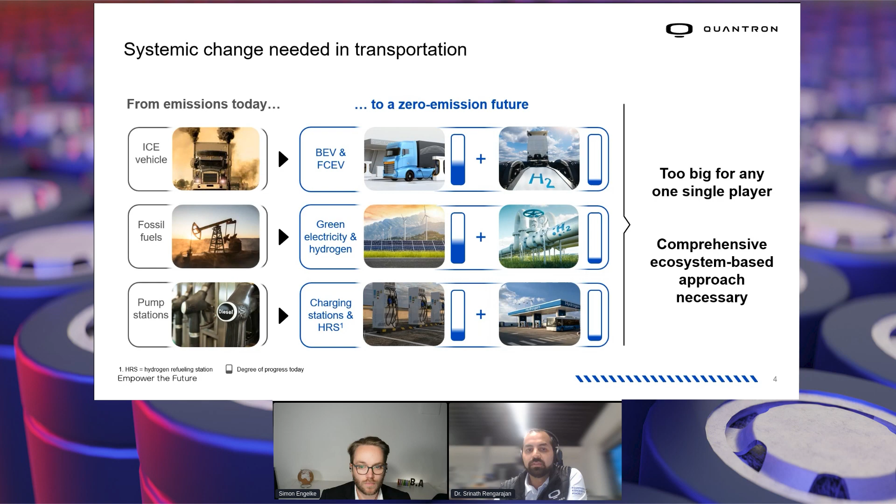But that brings me to the question: what are we talking about? Is it the battery electric or the fuel cell electric vehicles which will supposedly win this race they are in? These are, of course, the leading technologies we're talking about in terms of zero emission. There are other options too which have been explored - hydrogen ICE trucks, biofuels, synfuels, on-road charging. And there have been different views on which technology is better, even dogmatic opinions, with people calling one or the other technology really foolish, looking at various factors and saying this is better or that is better.

But we need to take a look at the bigger picture to understand, from a system level, based on use cases, what really makes sense. That's the key message I'd like to give you at the end of this. But where do these discussions always start?

They almost always start and sometimes also end with the question of energy efficiency. And when the industry experts are talking about that, it's always about the powertrain efficiency.

And that's sort of a no-brainer. If you think about it, battery electric vehicles, no matter if you're talking about passenger cars or electric trucks or buses, the battery electric solution is the much more efficient one. Well-to-tank you're talking about 85 to 90% efficiency in the battery electric case, tank-to-wheel about 70% overall, simply because there's lesser conversions along the way.

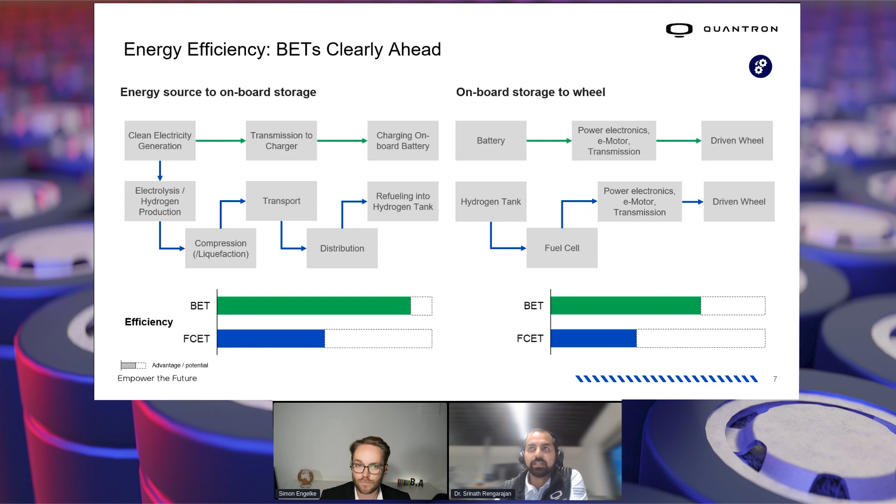And I'm guessing some of you are really happy to hear that, but it's a lot more complicated, especially when you're talking about commercial vehicles. And why is that the case? Like I said, you need to look at it from a system perspective, and the powertrain part is only one cog in that entire system.

There is the part about the energy, so how you're producing and transporting or transmitting the energy to the point of use or consumption, and how you're dispensing it, right? Let's probably take each of these and unpack them a little bit.

Maybe we start with the powertrain because that's the no-brainer. If you think about the technology readiness and industrialization readiness, I mentioned this a bit in the beginning as well, battery electric vehicles are generally a bit further down the road.

So what you see today is already the second generation of battery electric vehicles from the bigger vehicle manufacturers. In terms of passenger cars, it's even the third generation that you see now, so that's even further ahead. But in the fuel cell case, you're just beginning to see the first fuel cell based trucks coming to the market.

And there is, of course, this sort of, if you think about it in terms of a hype cycle, also a dip that the fuel cell vehicles or technologies are seeing, because all the hype that was there a couple of years back probably has started tempering down.

So we know about how things are going at some companies like Nikola, or when Hyundai is pulling out of the Swiss market because hydrogen prices are too high, etc. And that, of course, means that there's a teething issue, a trough of disillusionment that these vehicles and this technology is going through.

But if you think about it in terms of long-term reduction potential of costs, simply because of the way these vehicles are made - the material costs necessary for making batteries versus the costs necessary for scaling up the production of fuel cells or tanks for hydrogen - the potential for fuel cell is probably a little bit higher from today's point of view in terms of what we might be able to achieve in cost reduction. There are just physical and chemical limits that we'll at some point hit with batteries, which are going to be harder to negotiate, and then the next extra X% of reduction in cost will be that much harder.

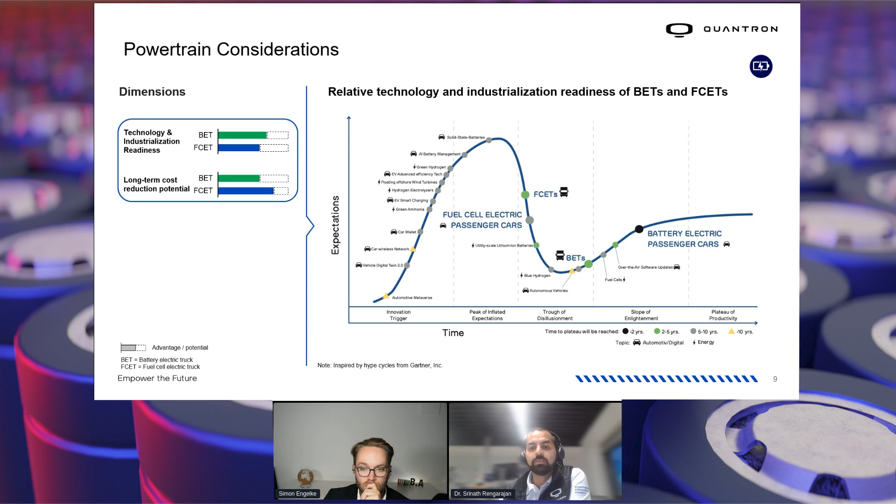If we move on, now talking about the component part, there was a nice study a couple of years back from the European Commission Joint Research Center, which looked at the different raw materials. We extended it a little bit with discussions in Europe as well as in the US with some supply chain participants. And there it looks a little more tricky.

I mean, the picture will look very different if you're talking about a country like China, which has invested heavily in the upstream and midstream of the battery raw materials as well as the fuel cell raw materials. But if you look at it in terms of supply chain risks, simply put, there is lesser risk in terms of the materials necessary for fuel cells today when compared to batteries, especially for manufacturers based out of Europe or US.

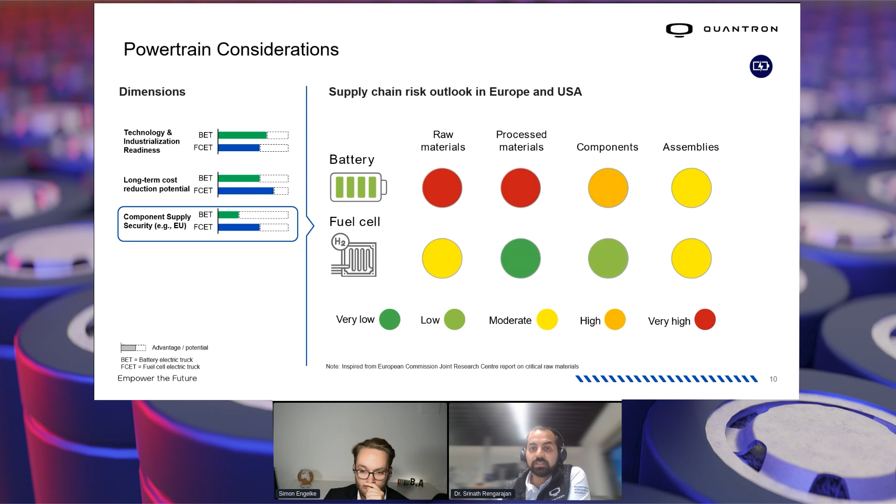And that brings me to the third point. This is an analysis that we did internally based on our own vehicles, but also benchmarking a few of the other vehicles. We basically decided to see what the difference would be in the weight of the powertrain, the more range you try to pack into the vehicle. So it's very simple.

The more range you need to get out of a heavy-duty truck, the bigger and heavier batteries you need. For a range of about 700 kilometers, for example, we already needed about 7 tons of batteries. In comparison, the fuel cell system was much lighter, coming down to about 2.5 to 3 tons, including batteries, tanks, fuel cell, and other aggregates.

So the question becomes a bit tricky, because if you're driving use cases where the amount of mileage you have to cover daily is not too much, then it's easier to say that batteries are the better, lighter powertrain solution. But the more auxiliary power needs you have - imagine you have refrigerated cargo on the truck that needs 20 kilowatt hours of energy just for cooling every hour - that massively affects what range you'll get out of the battery for driving.

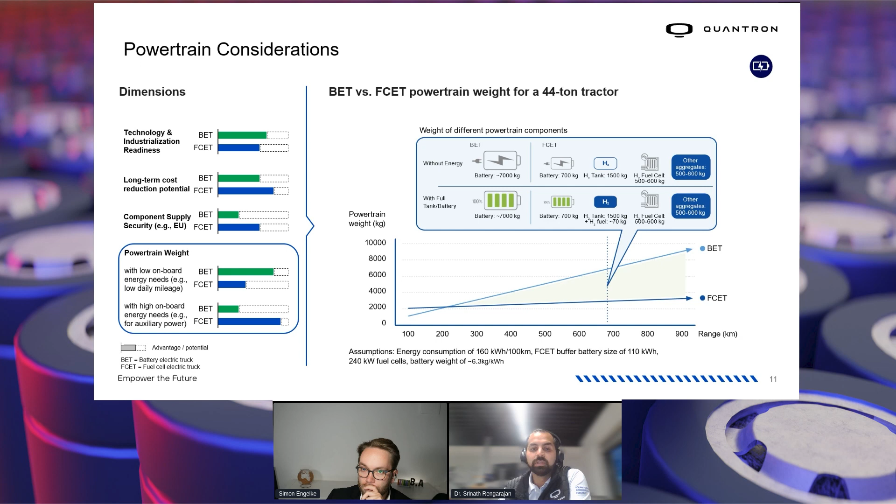And why is that important? Because then you need to recharge. And then it's a question of how much time you need for recharging or refueling the truck, and how easy it is for a driver to shift from today's perspective of refueling a diesel truck into a future battery or hydrogen truck.

From that convenience and time perspective, battery electric trucks even with CCS technology today, for 500 kilowatt hours of usable energy, end up with about 2 hours of charging time. In the future with MCS, that'll probably halve. So the dream of many companies is that you drive for 4 hours, then take 45 minutes to recharge, and then drive again for 4 hours.

That's the vision. But in fuel cell trucks today, it's already less than 20 minutes even for the heavy truck we produce at our company, for a full range of 700 kilometers. In the future, as dispensing technologies improve, we expect it to halve again to about 10 minutes of refueling from zero to full tank. This isn't linear in either case, but just to give you a feeling for how this looks.

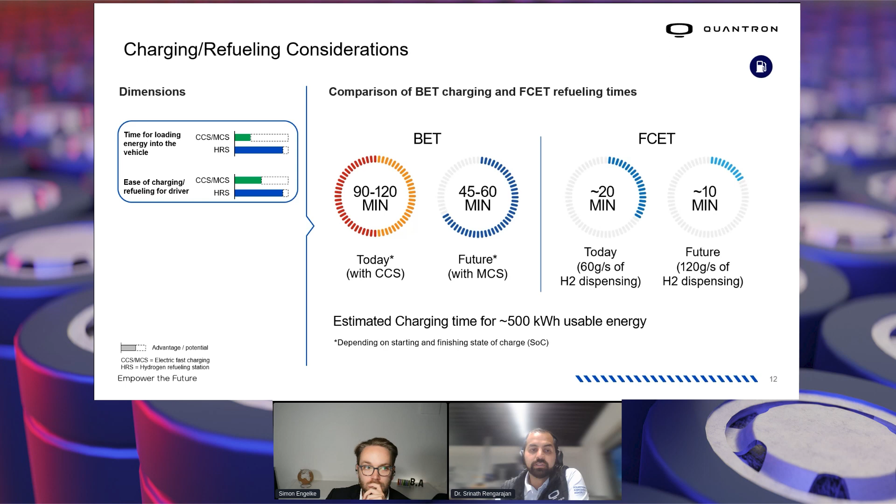At the same time, you have to think about it from a system perspective - how much space and money do you need for setting up a huge charging park, or a hydrogen refueling station? That's important because of the amount of chargers necessary just in Europe, based on an estimate from the European Electric Vehicle Charging Infrastructure Masterplan.

They estimated that for covering the use cases of battery electric trucks in Europe, we would need about 235,000 overnight chargers at depots, as well as 36,000 chargers with CCS plus MCS in the mix at public highway fast charging points - on top of super fast chargers along the highways. This would mean a lot of money needs to be invested in scaling up MCS charger production, cabling, grids, etc., for setting up that infrastructure.

And that's tough, because nearing the end of 2023, we still only have MCS in the prototype stage. Only next year will we start seeing the first series production of MCS. After that, within 6 years, building up that kind of network is going to be a huge challenge - and I'm talking about Europe, but the same logic applies to the US. In China, it's a bit different because battery swapping technology has taken a surprising lead there. We didn't look at that in too much detail because we focus more on Europe and US as a company.

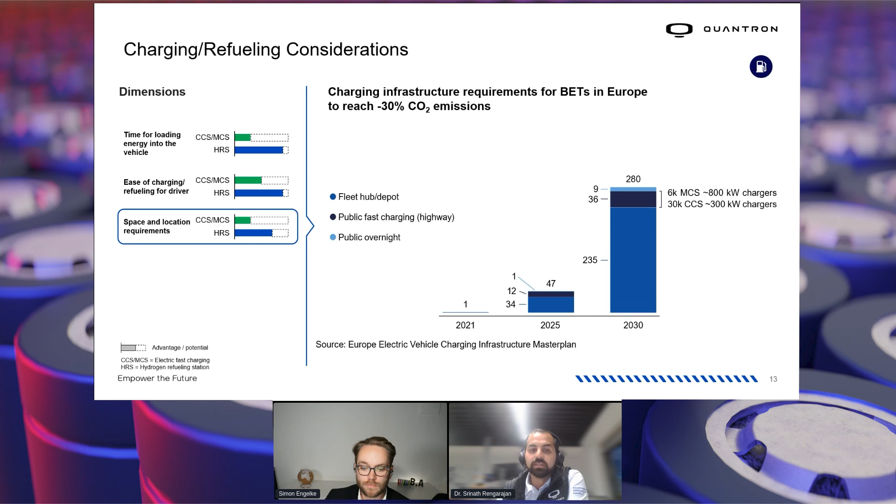And if you talk about hydrogen trucks, as a counterpoint, based on current European regulations, if you need about one hydrogen refueling station every 150 kilometers of highway as a target, then effectively you need only about 700 to 1,000 stations by 2030 to be set up. I say only, I mean that's still a very big challenge, but it looks a little bit more manageable from that point of view. And why is that important?

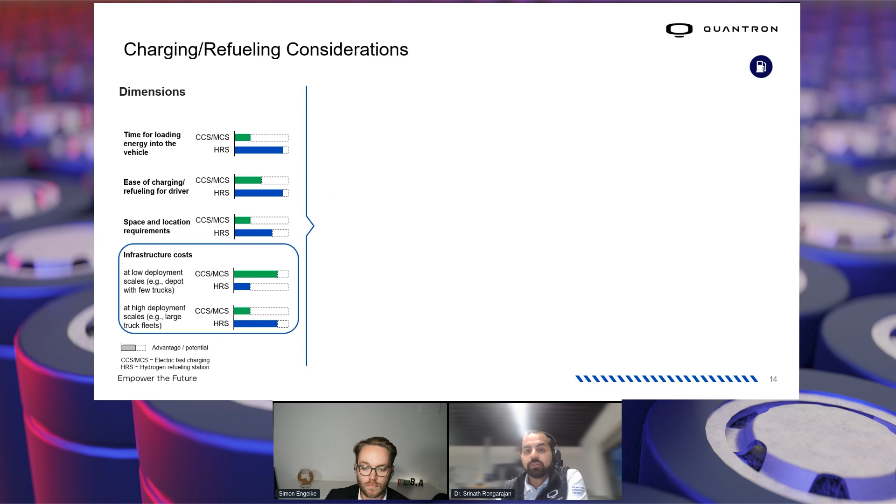Because with that you also have costs. If you're looking at the amount of cost needed for deploying this and the utilization rate, simply because a truck needs much higher time to charge than it needs for refueling. If you have a use case with a low number of trucks, the amount of investment for a battery charging park is actually low when amortized over the number of trucks. But the more trucks you have, the more difficult it becomes to set up a big charging park, because all these trucks are charging in parallel, and the unit cost of infrastructure then starts rising exponentially.

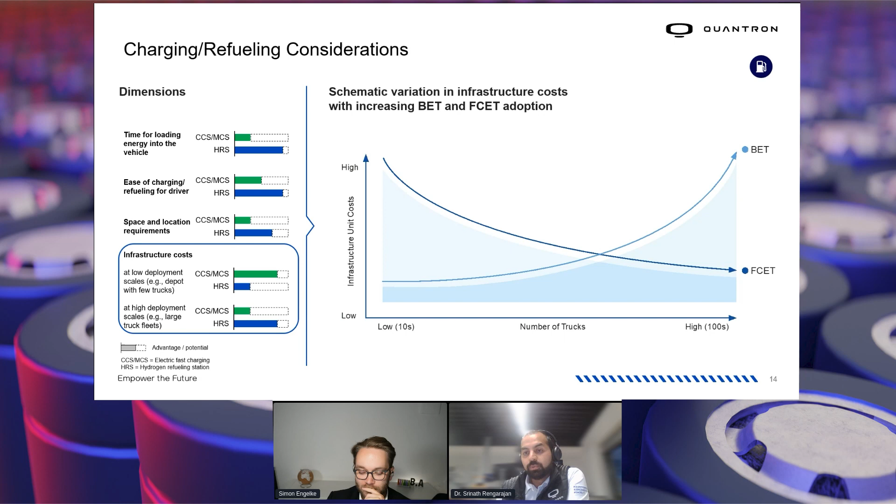But in the fuel cell case, it's exactly the other way around almost, because the same refueling station, which costs about some million, would then be refueling many more trucks. So the offtake of hydrogen from those stations would be much higher, and with a higher number of trucks, these costs start getting divided much more smoothly across the number of vehicles. And that brings me to the third point, which is energy.

If you look at the amount of energy available, there's simply more cleaner energy, so there's a bit of an edge to hydrogen from that perspective. There was a nice analysis by Hydrogen Council and McKinsey a couple years back. They said if you take the same solar panel setup and put it in Germany, which is not a sun-rich region, you'd probably, including all losses, end up at about 680 kilowatt hours from 950 kilowatt hours generated in a year. But the same solar panel setup, if used in the Middle East, would generate 2,200 kilowatt hours of energy. And even after you discount the losses in electrolysis, shipment, and tank-to-wheel losses in running, the usable energy at the wheel is effectively the same.

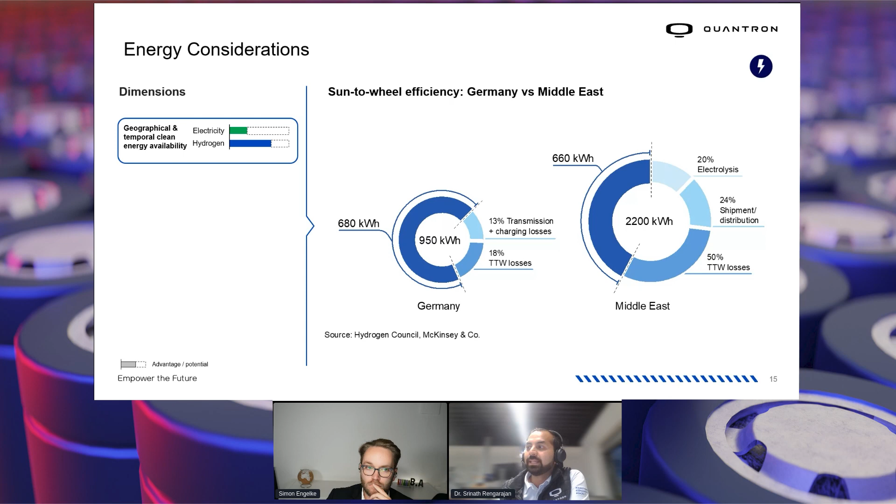So that was a very interesting analysis, because it says that despite transmission or transportation losses, you effectively end up with the same kind of energy efficiency from an energy perspective. And that's interesting because it's easier to transport energy. But I'll come back to that.

Before that, maybe just one more point on carbon intensity and energy costs. If you take the EU grid, for example, it's quite carbon intensive, and if you convert that carbon intensive electricity through electrolysis into hydrogen, that's actually very bad because the carbon footprint is much higher. But if you compare electricity generated from the Middle East, converting that to hydrogen and transporting it, against hydrogen imported from a green, sun-rich or wind-rich energy producing country, and benchmark that against domestic green electricity production in Europe or US, the hydrogen actually gets its nose in front a little tiny bit.

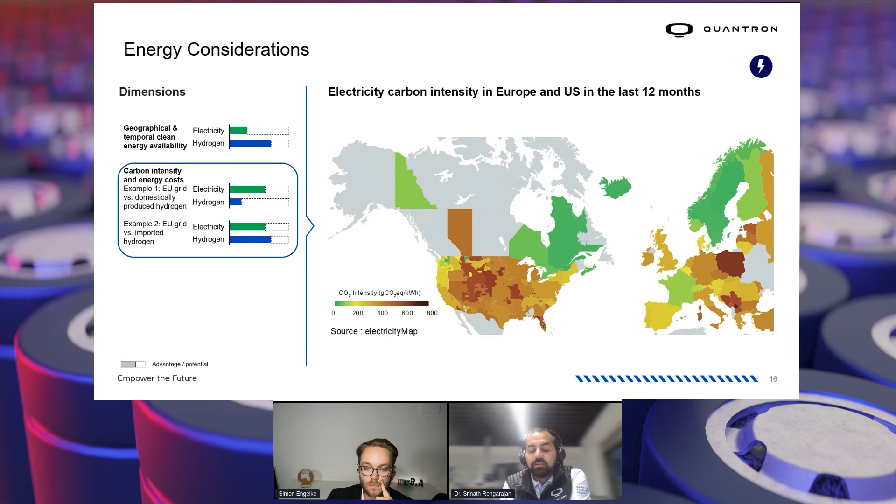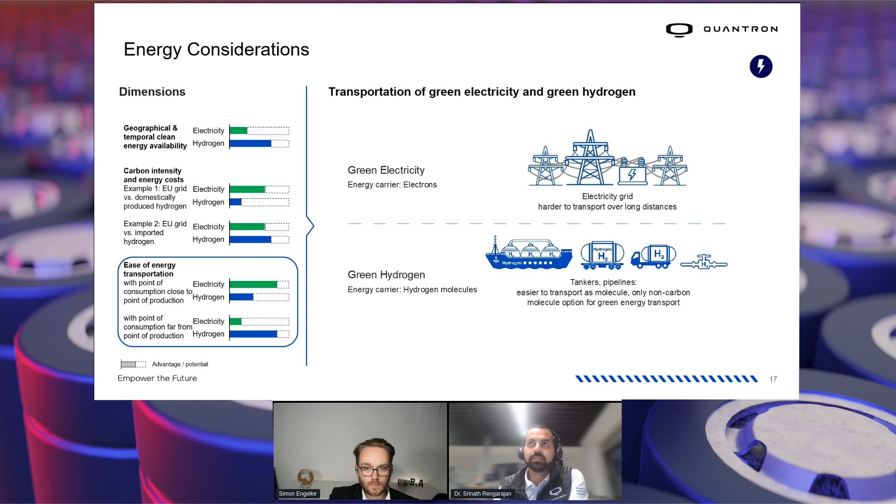So if you have tankers, trains, cargo trucks, or even pipelines, these are all various transport routes being explored for building up the European hydrogen backbone, for example. That could make the availability and cost of hydrogen, with scale, a little bit easier. And that means that if the point of consumption is far away from the point of production of energy, then the balance again tips a little bit in favor of hydrogen vehicles. What does all of this mean if you take it together?

Let's take the concrete example of trucks. If you have a high trip distance, if you have cargo which is constrained by weight, or cargo which is sensitive to time, so you want to move the thing fast from A to B, and you don't want a lot of downtime along the way, especially for charging. Those are all cases where fuel cell trucks make more sense, even from a cost perspective and a system efficiency point of view.

And the other way around, there are use cases, for example, if your cargo is not very heavy, if you have time to move it, if it's not a critical consumer good that needs to be cooled or something, then it might even make sense to move the cargo with a battery electric truck, because the efficiency speaks for the battery electric truck. That's looking at it qualitatively.

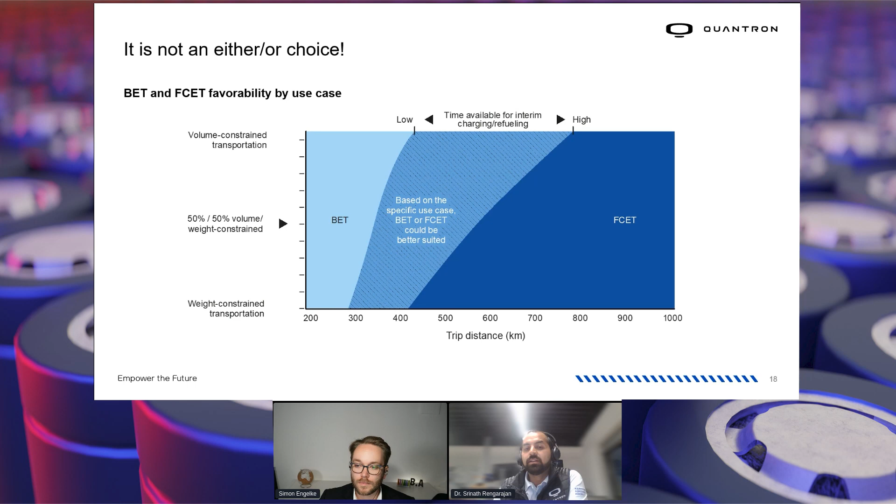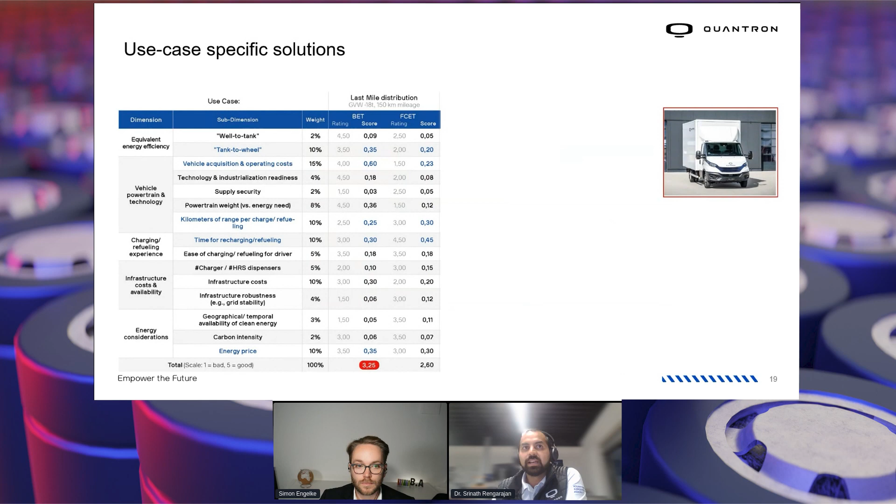We did the same exercise more quantitatively with some of our customers and test fleets. Last mile distribution was one example we took. We looked at all these factors, did weighting of these factors, and did a simple balance scorecard to see which makes more sense. Not so surprisingly, for last mile use cases within cities, we end up with battery electric trucks having a clear and distinct advantage. On the right is the truck we have in our portfolio for doing those use cases.

If you talk about regional distribution, with a bit higher tonnage but more mileage, we ended up with a case where the battery truck still had its advantage compared to the fuel cell, but it was just marginal. If you add refrigeration cargo, uphill topography, or longer rural distances, it goes the other way. For long haul, it was very clearly in favor of the fuel cell truck, to where the edge was.

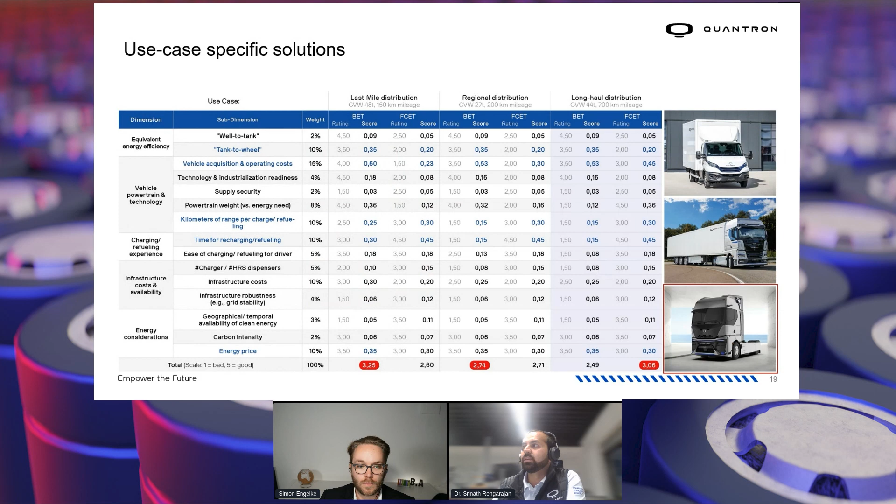That brings me to my last slide with key takeaways I'd like to share. It's very important to look at it from a system level to identify which use cases and applications are needed, and that determines whether a battery or fuel cell truck makes more sense. But from an overall perspective, at the end of the day, we're going to need both. It's not an either-or solution, it's going to be an and solution that we'll need in the future for decarbonizing transport quickly.

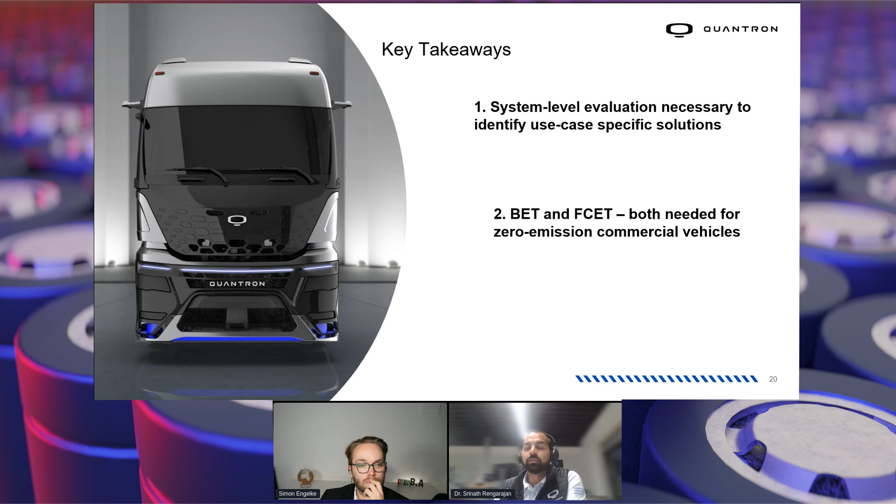If you're not willing to wait 30 years for the best-in-class solid state batteries to come and revolutionize everything to battery electric, if you're looking for solutions today and in the next 5 years, then we're going to need both to be done. Like I said in the beginning, we have to look at it from an ecosystem point of view, because all these technology, infrastructure, and cost challenges simply cannot be done by one company or one player alone.

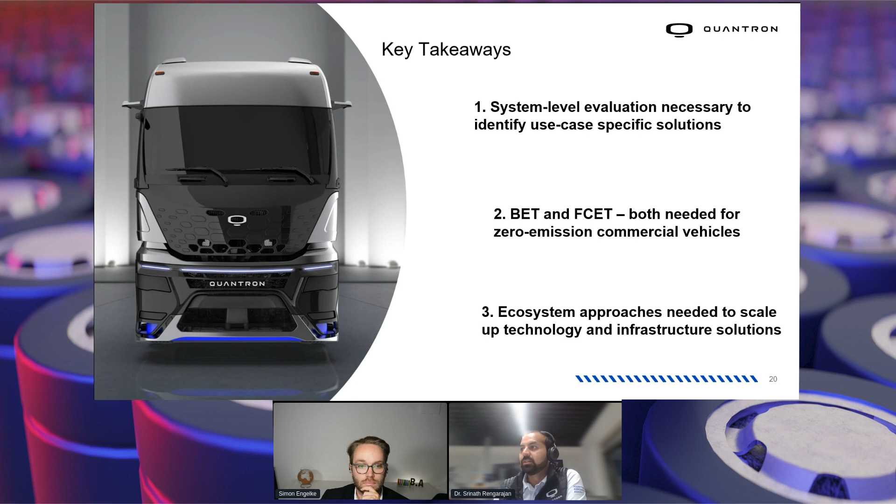Definitely good to have these thoughts on a battery day, because the one thing I'm still very happy for is that each of your vehicles, also fuel cells, also needs a battery as well. So exactly, there's no real issue there.